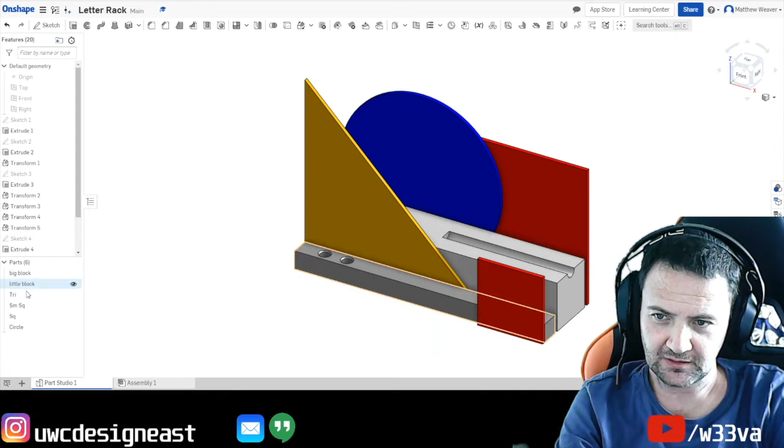I'm going to turn this into something we call an orthographic projection. In order to do that, we have all these pieces, they're all still there. We're going to go to the little plus sign, which is insert new element, and we are going to create a drawing. Okay, we're going to ISO, and the first time you do this, if you click ISO, that's A4, that's quite small.

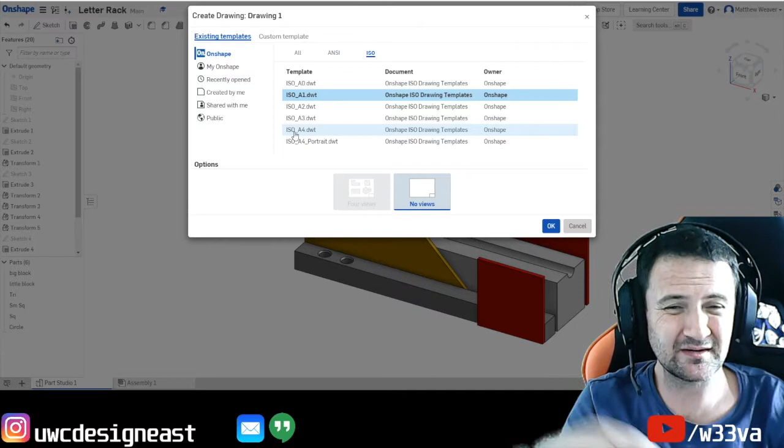We can do A4, or A3. I would prefer A3, but it's up to you. So we go ISO A3. If we go to custom template, ISO, they're actually better. We'll go A3, with millimeters, and we're going to do something called third angle.

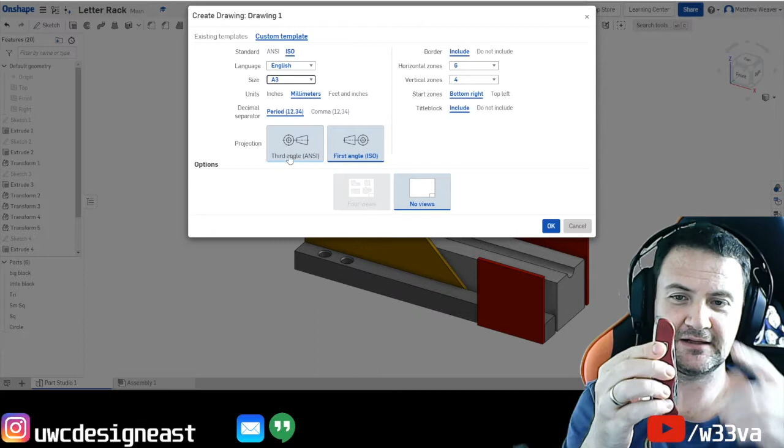So the way it works is, if I was to show you this pen knife here, in a first angle projection, let's say that is the front. In a first angle projection, the top view is projected through it, so it's below, and the bottom view is projected up. And this side - my right side view is projected through, so you see it on the left, and the left side view is then on the right. It's a bit confusing, but if everyone knows what first angle is, it's actually not confusing.

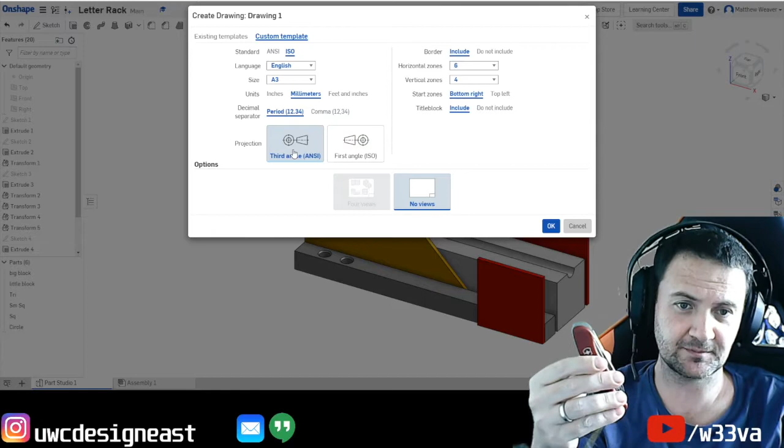We, however, use third angle, so I'm going to click third angle. Now, third angle simply means that if that is the front, the top is there, the bottom is there, right side view is there, and the left side view is there. And obviously, my left and your left are slightly different. So we're going to use third angle because life becomes much easier.

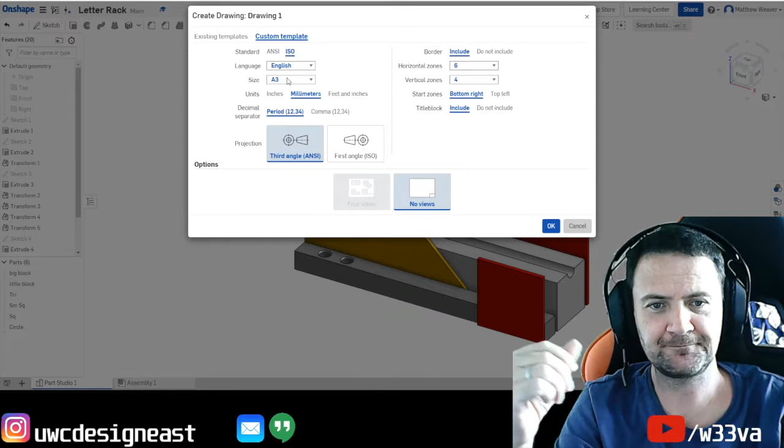We're going to use millimeters because that's how we designed it. We're going to use A3 because it's a larger sheet of paper, which means our scale isn't so crazy. And when you're happy, you're going to press OK, and that's going to start creating the drawing for you.

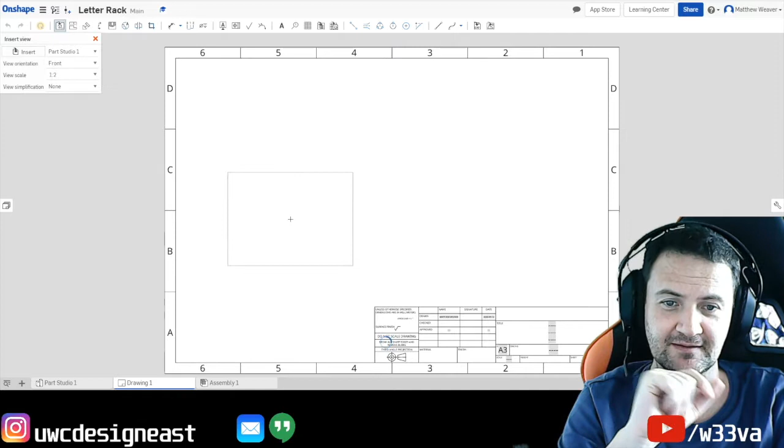When we get to the drawing, we're going to place the first view. We actually want everything, so instead of the individual parts, we're going to go to the Part Studio and click that. That was the top piece, that is everything. You can do it individual parts, but you don't need to. If you did do it individual parts, that would give you your cutting list. So as long as that's 1-to-1, that would be okay.

So at the moment we have got no scale. We're going to place that there, we just press click. Now we're at a scale of 1-to-2, which means this drawing is half the size of the actual thing.

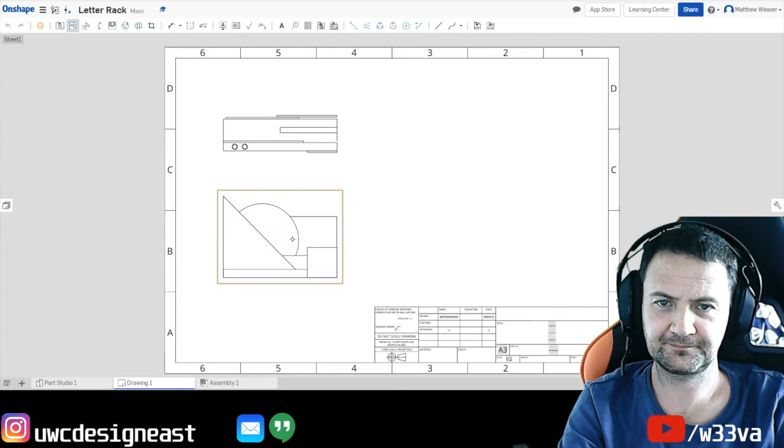Now click this one, projected view. So if we come up, can you see how that changed shape? That's because now we're looking down on it. Okay, we're going to click that, and then we're going to come across. We're going to click projected view again, so let's click this one. We're going to project that across there, and click that.

Now here's an interesting one. The distance between that and that should be the same as that and that. So if there was a 45-degree angle there going up, then that could be projected down. But obviously that is old-fashioned stuff, so you don't even need to do that anymore because we're in a different generation now with computers.

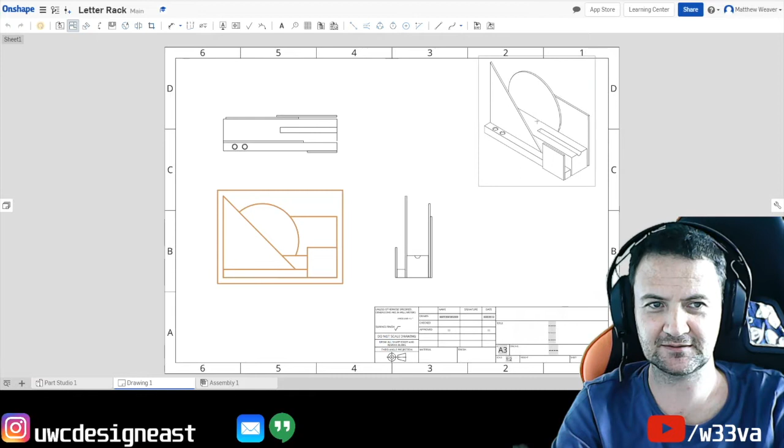Okay, this is the A3 piece. You can even write your name on there - oh look, it's already done your name for you. Now one more cool one. I'm going to click that, and we're going to come up. We'll put that up there for you. See it? Does it work? There you go, and there is your 3D version.

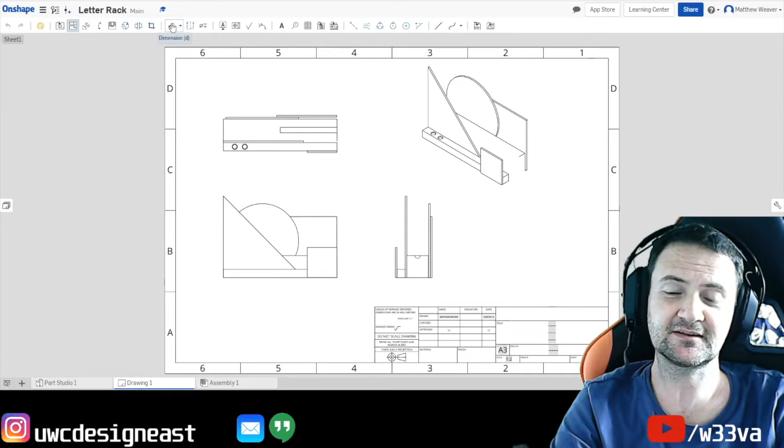Now what we can do is we can export that as a PDF, or we can screenshot that and save it. But before we do that, we now need to add the dimensions so that we can use this to help us. Oh, that's a bit of a bad render.

Oh well, and we're going to add the dimension so that we can use it to actually make that. Why is that 209? I'm sure I made that 210. Okay, plus minus 0.1, which does make sense. So let's just change that.

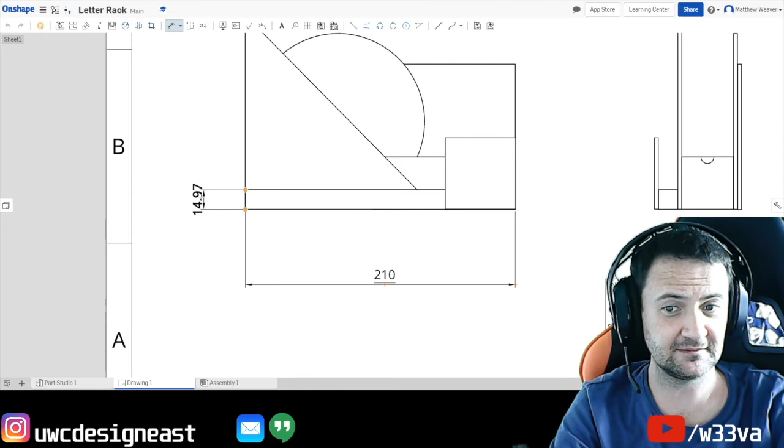Press enter and do another dimension. That one and that one should be 15. 14.97 - that's okay, let's just call that 15. Makes our life easier.

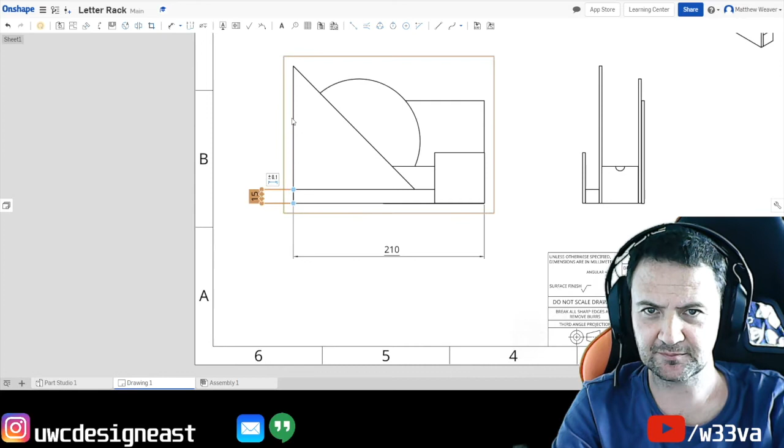Okay, and then we've got our triangle, and remember our triangle goes from there to there, from the bottom to the top, so click dimension. Triangle is from there. We can do it like that, so 148.5, that's accurate.

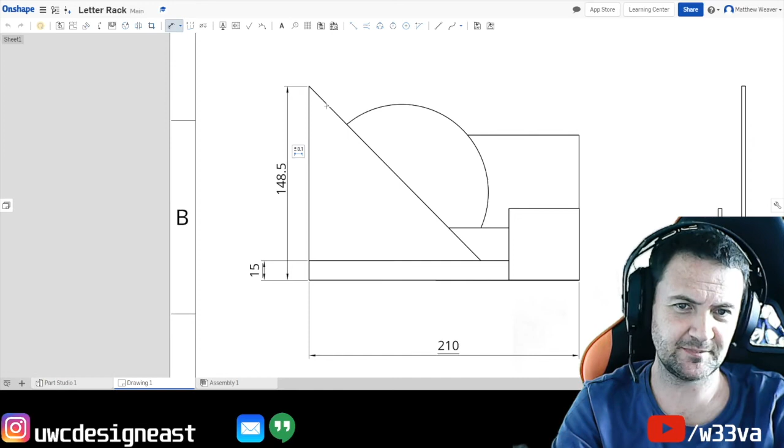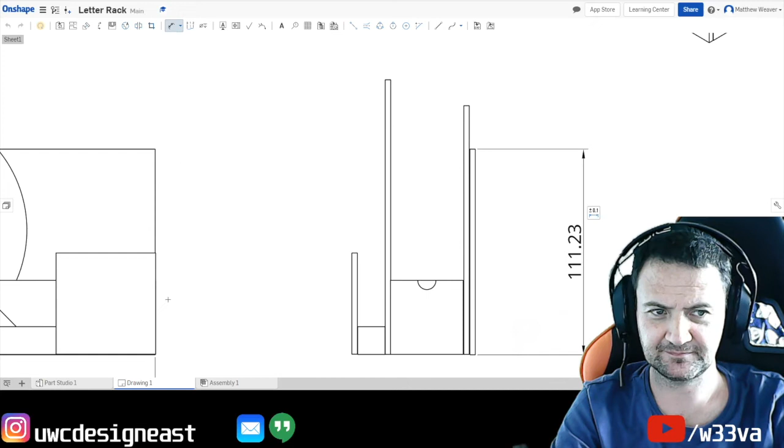And we've got our square. Now, it's a good idea not to put your dimensions here because you don't want it to look too messy, so we try and keep our dimensions to the outside if you can. If you can't, it's okay, it's understandable. But we do know that our square is that one at the back, so that dimension, from there to there, is actually the same as that dimension. Again, if you're not happy with that, click that there and go 1, 1, 0. Press escape to get rid of it.

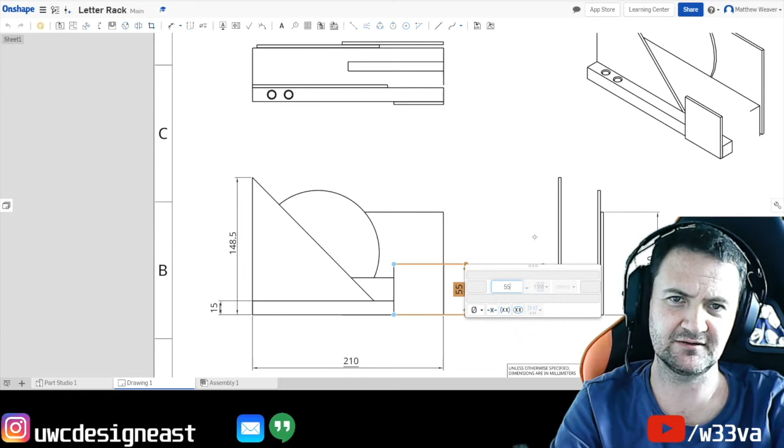Okay, and then we've got the small square. Now, the small square, what I can do is I could do it this way. So if I click there to there and go across, then I've got a line going across all my work, and that's no good. So that one I think is okay, we can just put that there. I'm just going to click that and turn that to 55. And of course, having proper integers does make my life easier in the long run, and remember, DT is sort of about making your life easy.

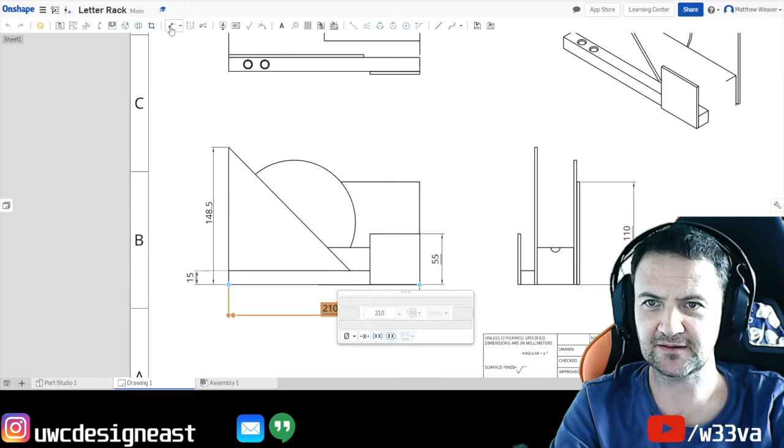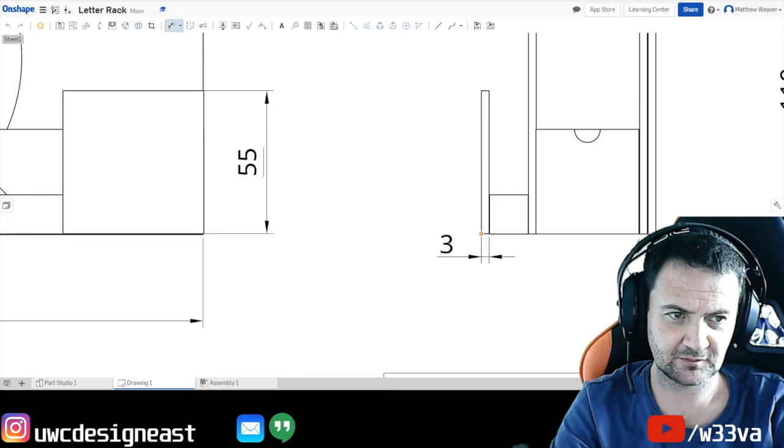Alright, so there's a few more that we could do, so we can actually - that's going to bother me, let's just move that up. Done, so that line is going to be consistent with the dimensions I'm about to do. Can I do a running dimension? No. Okay, so we're going to dimension this one. Three - see that line there coming up? That makes life a bit nicer. We can make that there, and then that all the way to the end can be there.

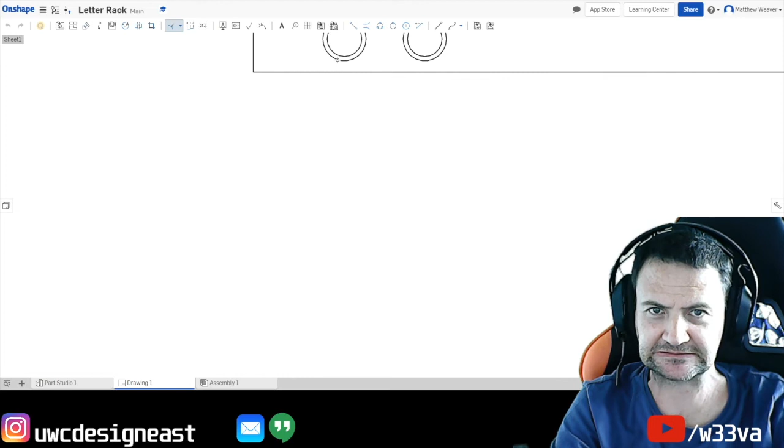Okay, last bit - second from last bit is we got the chamfer, and we knew that we had a chamfer somewhere, it was there. Can I do a chamfer detail? No, and I've got no hidden details here either. Okay, ignore that, we're going to make it too complicated. Go back to your radius or diameter if you want - we did have that one.

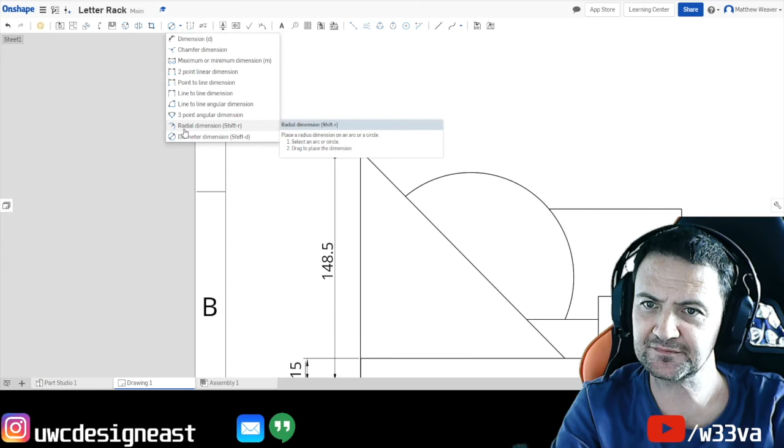Yeah, okay, see the diameter's making a line through it. Let's leave the diameter - why don't we do the radius? Remember, the radius is half of the diameter, so that makes it easier, and we'll just do that at 68.

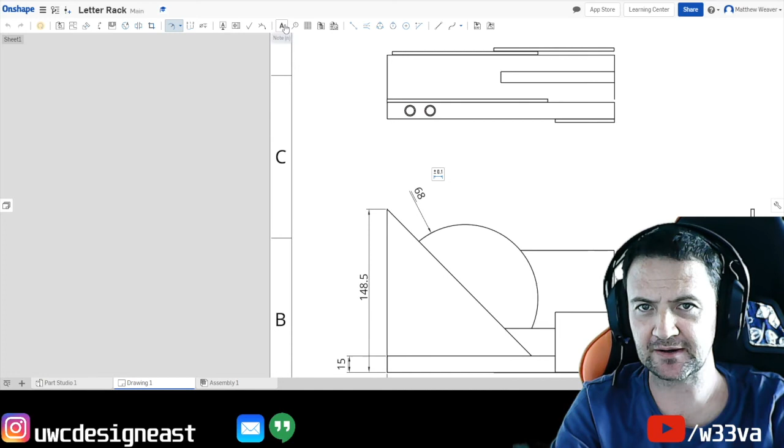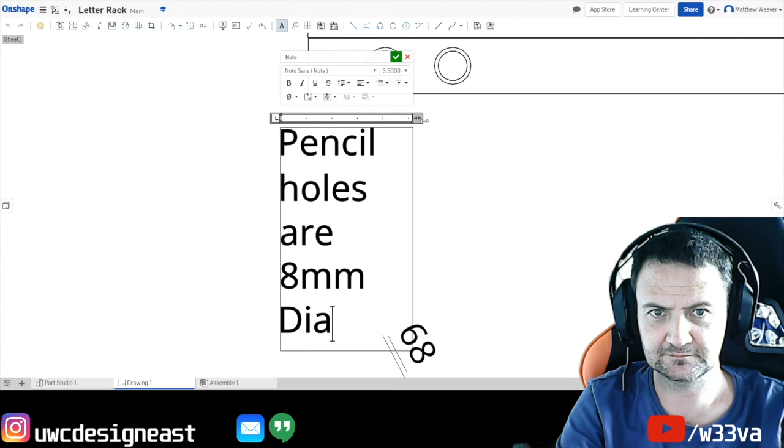And there's one more that we can actually do, and that is the size of the holes. Now, I said that they were 8 with the chamfer, so how about we do a little note here, and then we can actually write: pencil holes are 8mm diameter. And tick that and leave it. Okay.

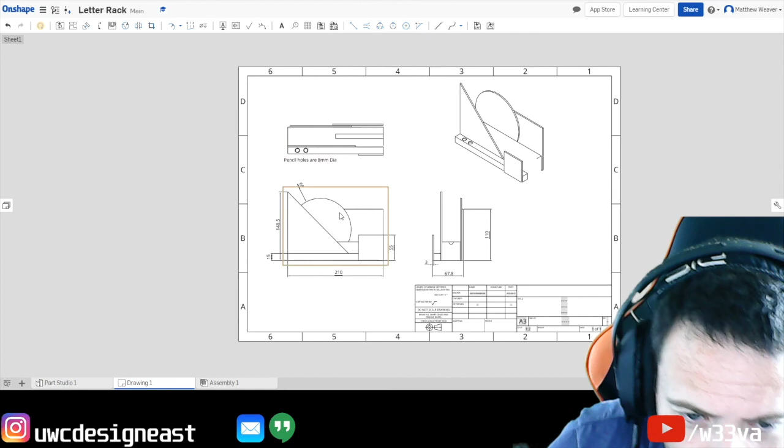Alright, and then you can then also add all the colors to that as well, and that's pretty much it. So if you've got that far, well done. If you haven't, watch the video more carefully, have another go, or ask your teacher. Or if you can't ask your teacher, ask me and I'll talk you through it.